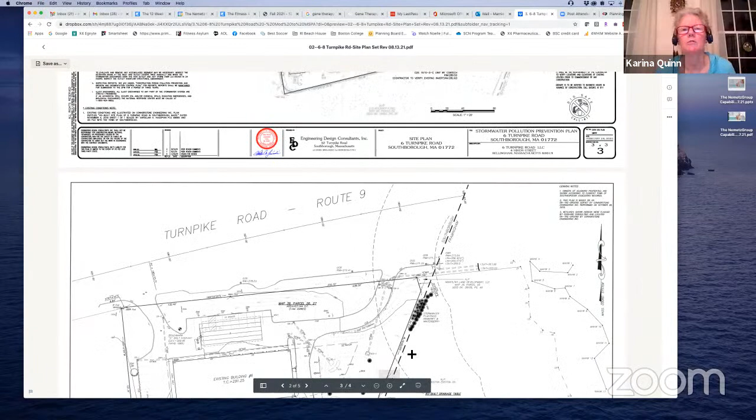So you see that cluster of shrubs right there? That's the cluster of vegetation. At least the way it's labeled, it should have been in the detention basin. Should have been designed around, should have been installed around—see, because it says stormwater plantings, inkberry and winterberry.

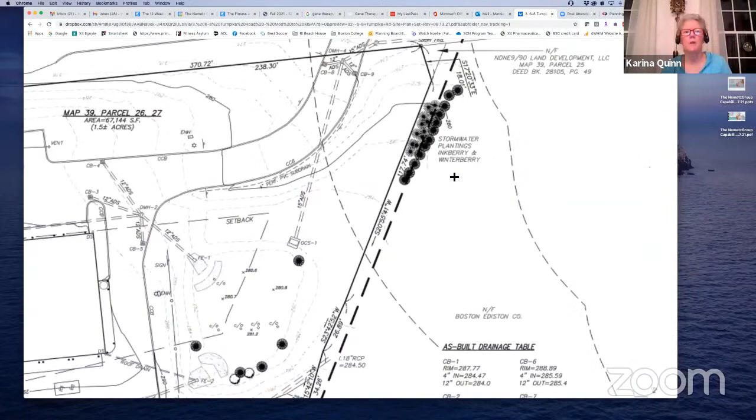So if you zoom out a little bit more and go to the bottom right corner of the property, you see what looks like a pipe running from 10 Turnpike to the south, across the corner of the property and back into Boston Edison property. If you look along the property line right there, the line on the right is the Framingham town line. The line on the left is the property line for 6 to 8 Turnpike.

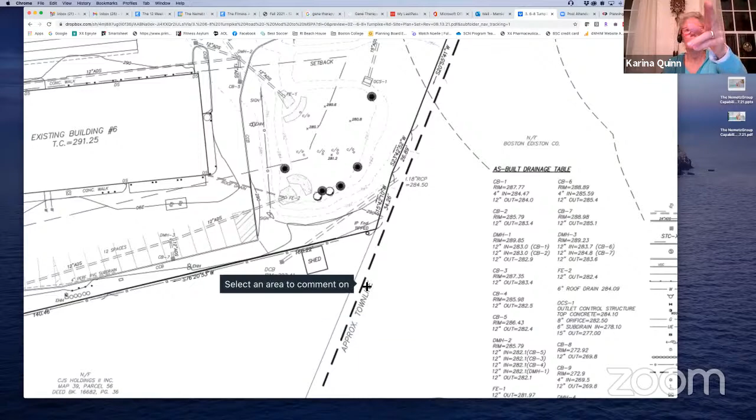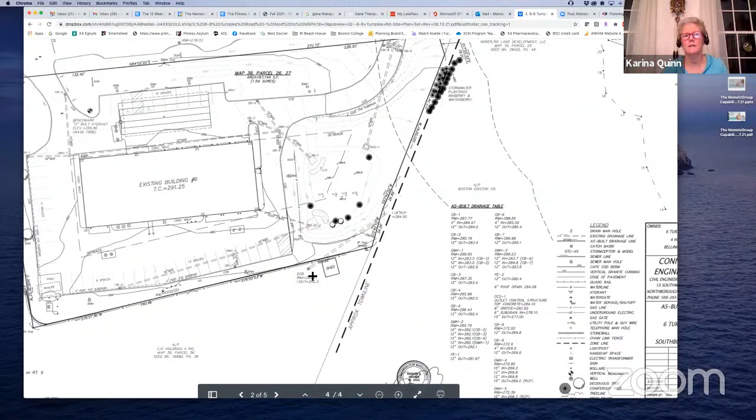In between there, I saw remnants, or what appears to be a stone wall—stone boulders, almost like you see on a scenic road, kind of cobbled together. But it's overgrown, and there is an outfall on the other side of that wall, I believe, which represents the end of the pipe back into Boston Edison property. I don't understand that condition completely.

So that's why I was looking to Peter to explain if he had spoken with Connorstone. Again, with Connorstone, all I got was that this is the as-built for the site, and they really weren't going to have any more involvement with it, at least from their perspective.

I know 10 Turnpike did have an inquiry regarding their drain pipe. There is no easement on 6 Turnpike for that drain line. But you're talking about the one in front. So they wanted to connect to the drain line in front of your property. They want to tie to the manhole in the driveway at Route 9. That's the one they were talking about.

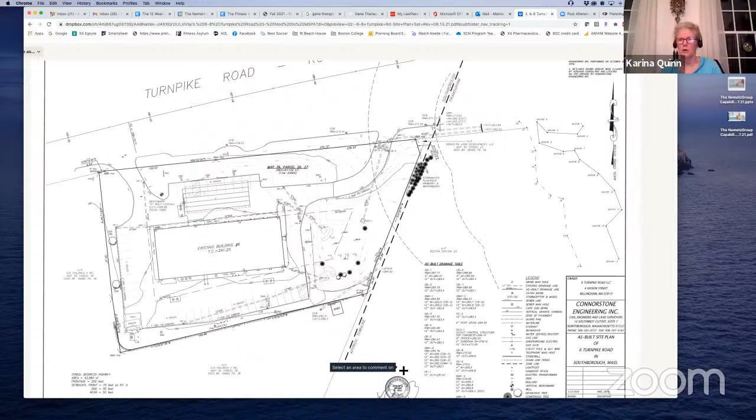I don't think it had to do with this one. I could be mistaken, but they're talking about along the front of the property. Right. And again, as I said to you, that's a modification of their plan, and I didn't really want to be involved in anything to do with their project because they don't have an easement on our project. And the property owner at 6 Turnpike really didn't want to entertain anything other than his proposal, which should stand on its own merits and have nothing to do with 10 Turnpike.

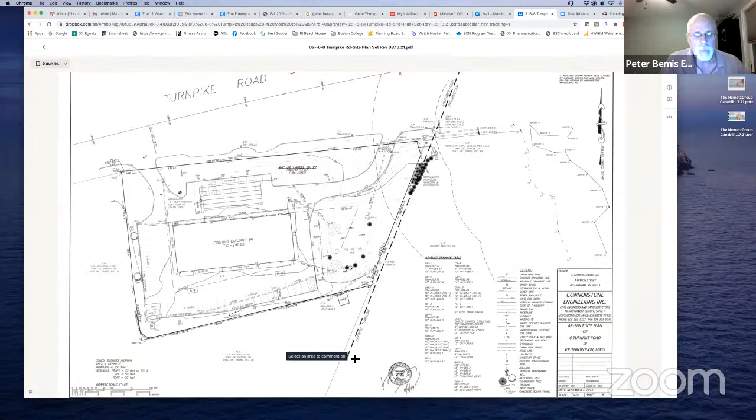So I guess in summary, the as-built is what we have. I don't have an engineer certifying letter that's required with an as-built, so I assume this as-built was for the Board of Selectmen's purpose. I believe Attorney Galvani was the attorney representing the applicant at the time with the Board of Selectmen for the additional parking for car sales. So we have an as-built, but it hasn't been reviewed by Fuss and O'Neill, and that's the as-built being used as reference.

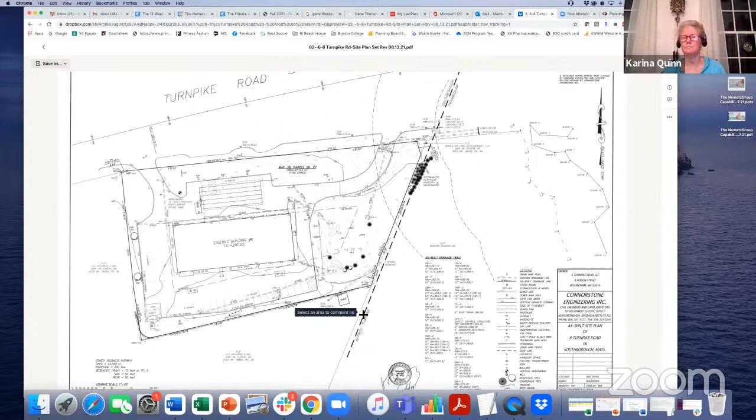So my question is, if we approve this modification and we don't have an as-built that proves the previous approval has been complied with, does that negate the conditions of the previous approval?

Typically, when I prepare a decision for a modification, one of the conditions is that all prior conditions still hold as applicable. So if a condition said plantings in the detention basin need to be such and such, that would still hold. But if it said a stone wall has to be built, then a stone wall is still required. If a southern perimeter wall was required as a condition, that's still a condition of the site plan. I always try to include that all prior conditions are still in full force.

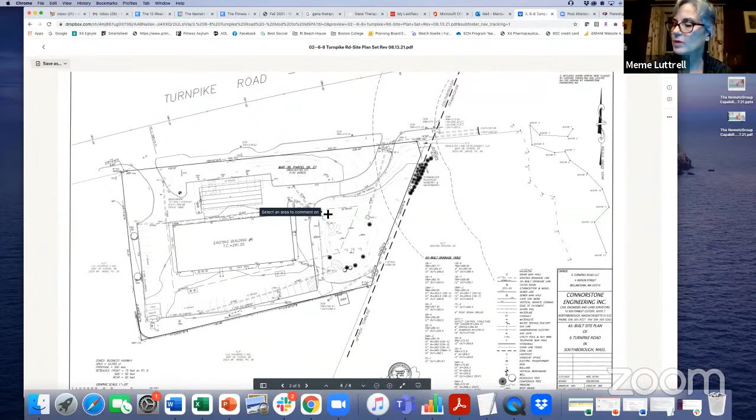And on to, just to be picky, the 3 to 3.5 inch pin oaks - to be clear, caliper pin oaks. I thought it was caliper. 3-inch trees, I apologize on that one.

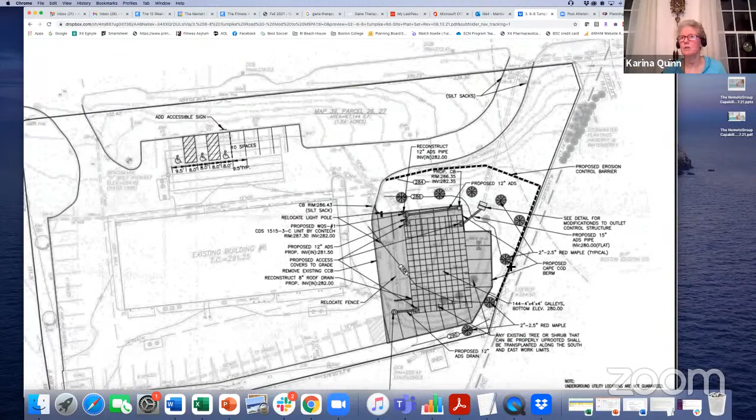Also, the maples - are they supposed to be 3 to 3.5 as well? So they're being replaced with pin oaks, 3 to 3.5 inch caliper. Well, the current plan, Peter, still shows that the maples are 2 to 2.5. I know I had said that went out inadvertently and was caught after, and I did provide an annotated plan, but I don't think you allow screen sharing, so...

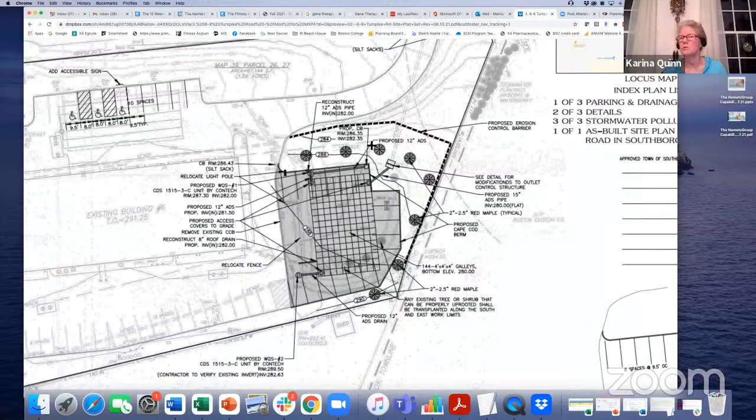I looked at the plan, Peter, that you emailed, and it still has red maple at 2 and 2.5. The one you sent this afternoon still has the same. I just want you to know, I emailed you back. Okay, I didn't - all right, so it's missing that caliper notation and it's still showing 2 to 2.5. Okay, fair enough.

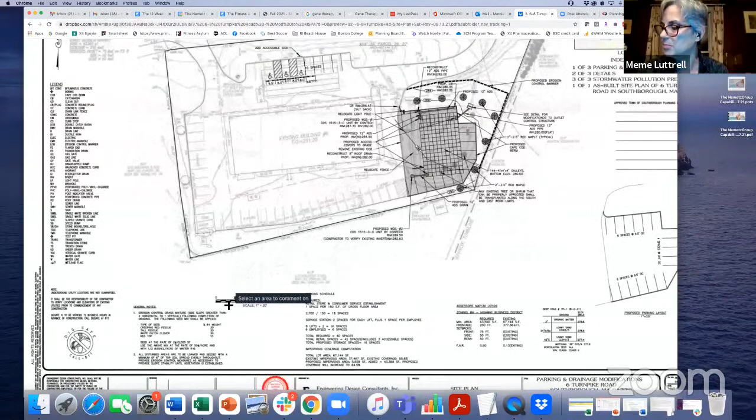And then there's a note that trees in the existing detention basin that can be properly uprooted and transplanted shall be. And if they can't be, can they be replaced? Sure, I put that in there only because I thought they were transplantable. As you identified, all those planted along the common boundary would have probably been in the basin, so at least those are someplace else other than where we want to do this expansion. I'm committed to that - absolutely, if they don't take, we'll replace them. I'm fine with that condition.

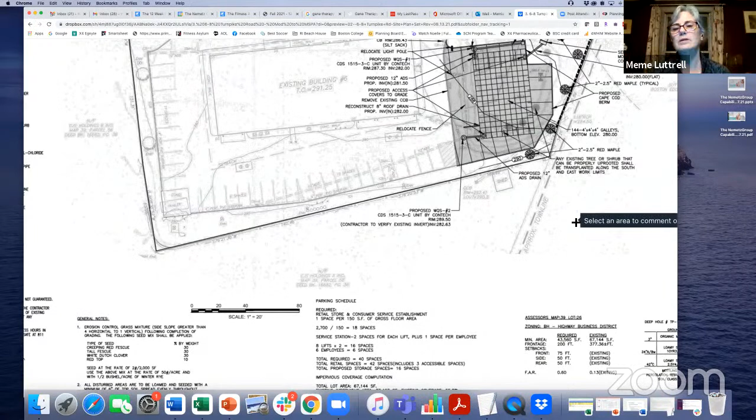So although you explained the stormwater and it's more efficient, none of the LID techniques required to be utilized in our bylaw have been utilized on the site.

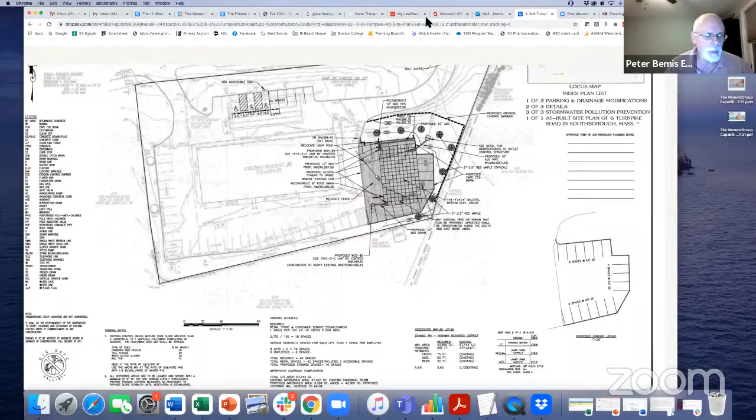So again, that's where I was going with those overriding principles. I try to read up a lot on LIDs so I understood it better. I mean, some of it's a philosophy - in many communities, they emphasize 5 or 6 principles and don't even talk about the physical attributes of stormwater, just about making things easier and more palatable. The Commonwealth of Massachusetts has their list, and I was pretty much reading from that. I think infiltration of stormwater is a smart growth technique. It's the one being implemented on this site, and by holding more water back and reducing the rate of runoff from the site, that is also a LID principle.

Yeah, I'm not using a rain garden, I'm not using a rain barrel, and I'm not using open channel flow. I explained pretty much why I can't use those principles - I'm not allowed to tie into the Commonwealth of Massachusetts Mass Highway system with open channel flow, they're just not going to allow it. So where I could make the changes, I did, and I'll leave it to your better judgment as to whether this does it. Conservation did support our proposal, and I'll leave it to your judgment as to whether we do or we don't. Thank you.

Thank you, that's all I have. Mrs. Hoolahan - I have no additional comments. Okay.

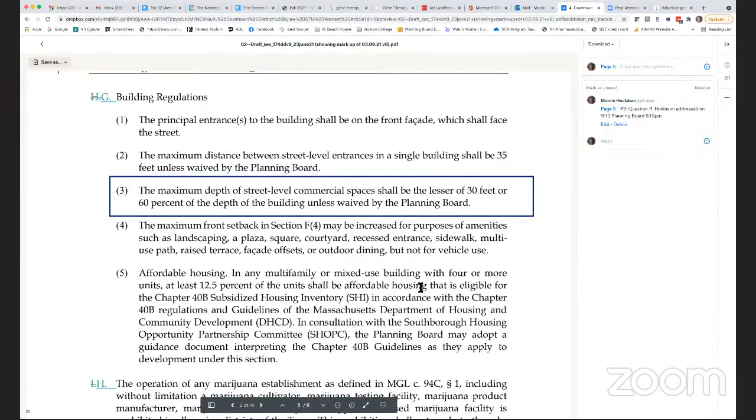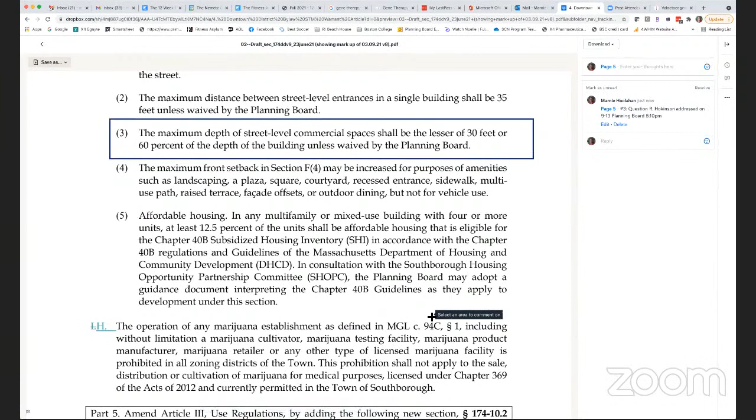And then the rest of the numbers all sort of work out that if I turn around and take a look at the floor area ratio — I can't remember the mnemonic here — sort of my house pretty much winds up being about the size of the lot. So if I've got a building about the size of my house, I need to put it in a lot that's roughly the size of my current property. So just that number, if I'm going to create a 30 by 30 foot space, I need roughly a 1/3 of an acre to 0.4 acres to have that business, based on multiplying through the rest of the numbers in the document.

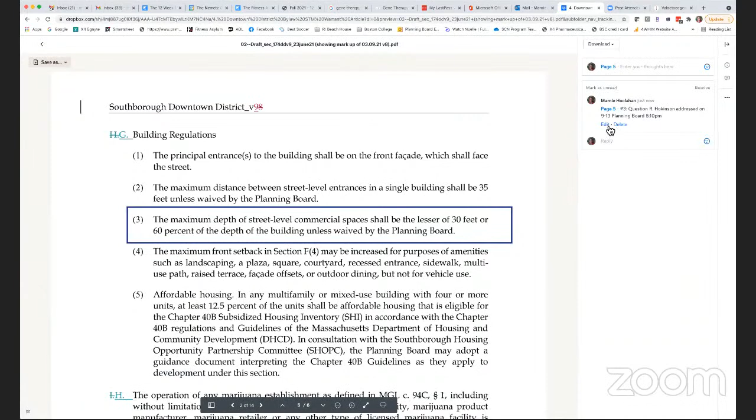So I find that a little bit concerning that, if we're supposed to be encouraging businesses, we're actually restricting the size of the first floor and actually sort of forcing part of the first floor to be residential.

Seems counterintuitive to me. Right, yeah. Now what I'll do, just because it's a little bit complicated, what I... Ray, thought can you hear me? Yep.

I'd like to ask you at this point, would you recommend deleting item G3? That would solve it.

I mean, I could use the whole 30 feet, just hypothetically. I haven't worked on other sort of geometries here. I've started off with squares because it's easy.

Well, if it doesn't work for some buildings, which would necessarily be one building, which is yours, then there's something defective. I'm looking at this and saying, if this section is removed, if number 3 is removed, how does that impact the rest of it?

Well, I think 3 needs to be cleaned up, and one solution, I don't know what type of overhead would be needed in a building to accommodate access to the 2nd and 3rd floors. So it's some sort of factor there. 60% seems a somewhat arbitrary number, because all you really need is some sort of stairwell that would allow you access up to upper floors on a mixed use building.

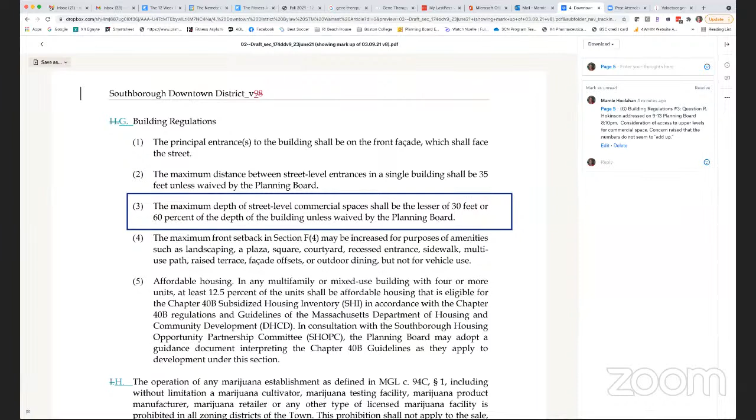Kind of hard to describe, but I did find that there is, in my case, a maximum of 20%, a minimum of 10%, and I think it should be closer to 33%. That's sort of, I think, and I can understand the big building issue, but the big building gets triggered with the planning board review. Something over a certain size requires the planning board review.

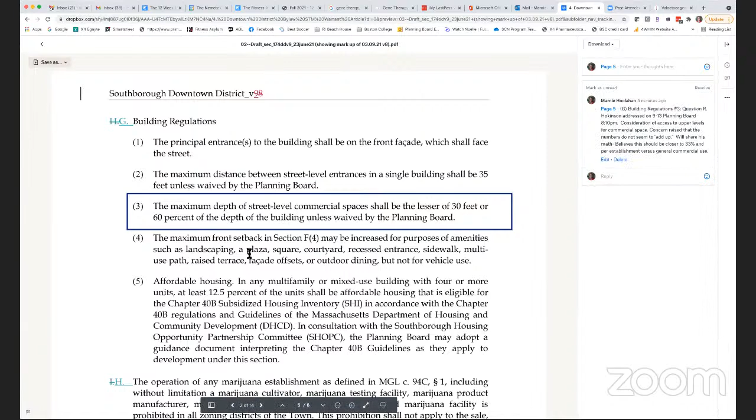So maybe that covers that. I'm not sure, actually it's a much larger size than my first floor anyway. So that was that. I guess my only other issue is to just make sure that there is some sort of system for closing on some sort of open items.

And 2 open items from past meetings. Well, one of them is just this example, and it was that 10% minimum commercial space. That was an open item. And I did request early on at the first meeting that, I think it was Claire Reynolds, who said that there was some sort of memo documenting the benefit to the business or either the appraised value of the downtown businesses.

Trying to say that somewhere along the line, somebody should work through a mathematical model showing that if you do the sort of build out allowed by this zoning, what's the impact? What's the benefit to the town, quantitatively? That was a request in the first meeting. And I'd really like to see some sort of demonstration quantitatively that all this is for the benefit of the town, as opposed to for the benefit of a few builders.

That was an open item, and I'd just like to make sure that we don't lose track of those open items and we close on them. That was it on details. I can have one other one that's slightly off. It doesn't go directly towards the details of the document.

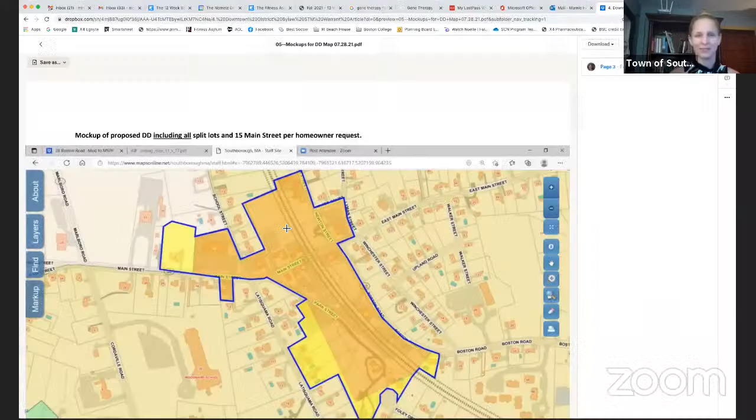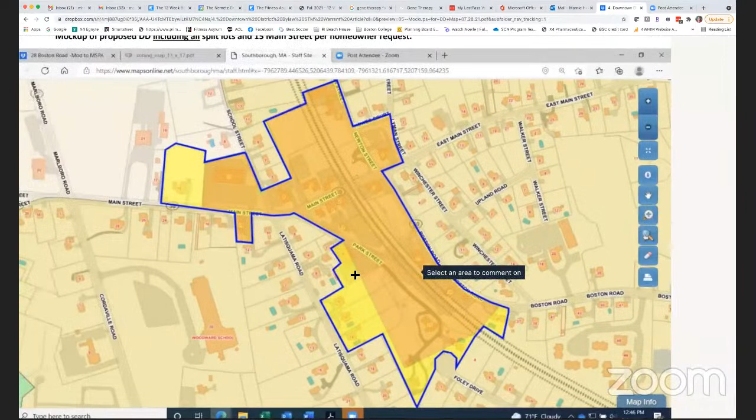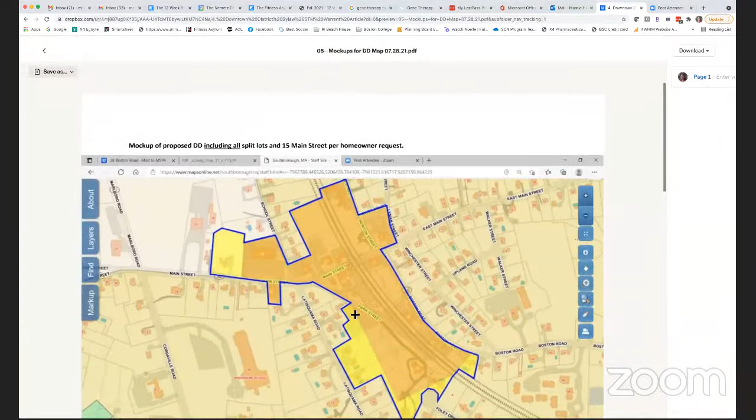Number one is, it's a little hard for me to see on my screen here, it's rather small. The mock-up including, is that the first one I'm seeing now? Yeah, number one is the mock-up proposed DD, including all split lots and 15 Main Street per homeowner request.

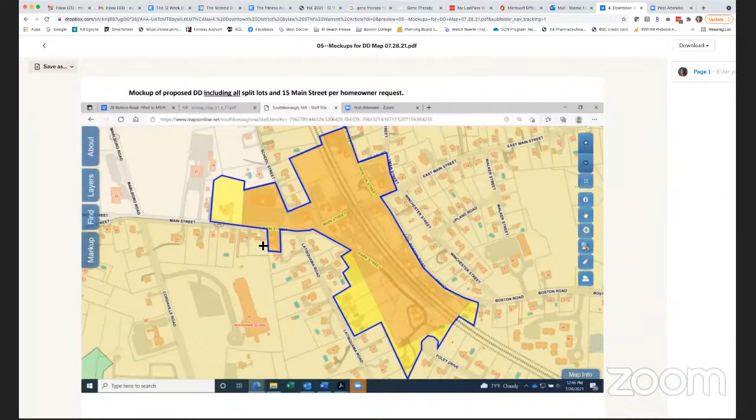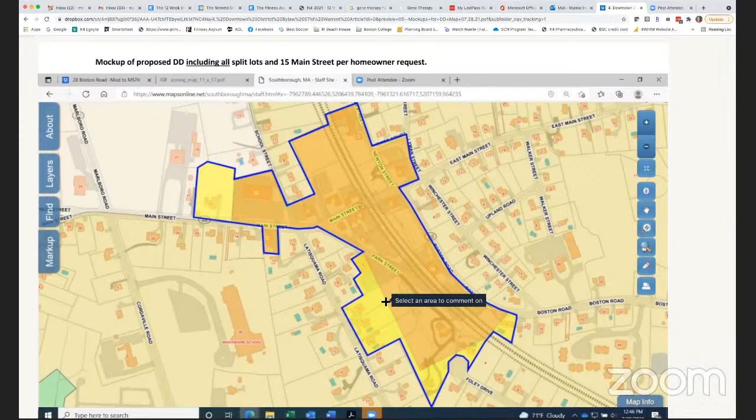And that's interesting to see, of course, completely would be absurd. Putting, for instance, I believe that would be 10, 12, and 14 Latisquama, subject to, for instance, demolition, and somebody could build a nice Applebee's on those 3 contiguous lots. So that's not going to happen.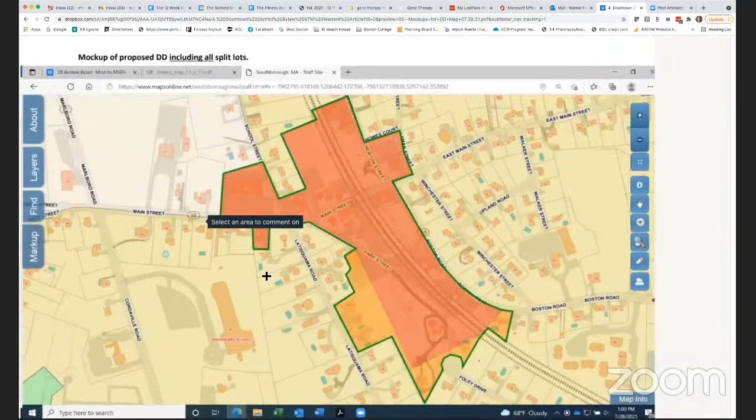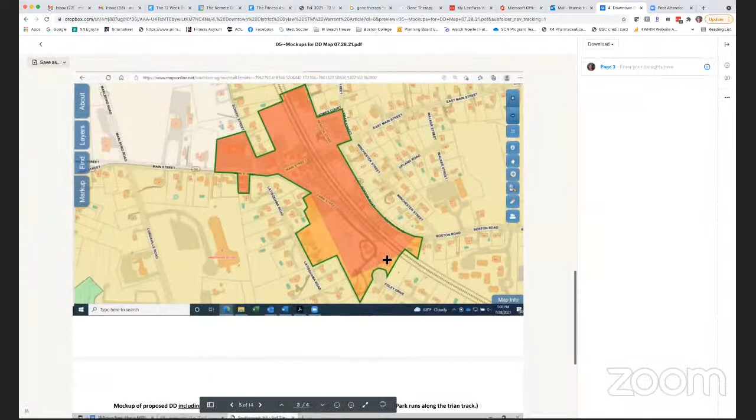Number 3, including all the split lots again, interesting but crazy. Number 4, including only split lots at 5 and 25 Park. Excluding. Including only, that's number 4. I'm skipping ahead to number 4, including only split lots in 5 and 25 Park. Again, the inclusion of 25 Park is actually crazy.

And there's actually an error there because that rendering also includes the CSX parcel. That's a 1-acre lot. 25 Park does not run along the train track, but the CSX parcel does. So 25 Park is buffered from the railroad tracks by the very slender, almost like a sliver of CSX property. That's where Falcone parks their trucks on the west side of the tracks.

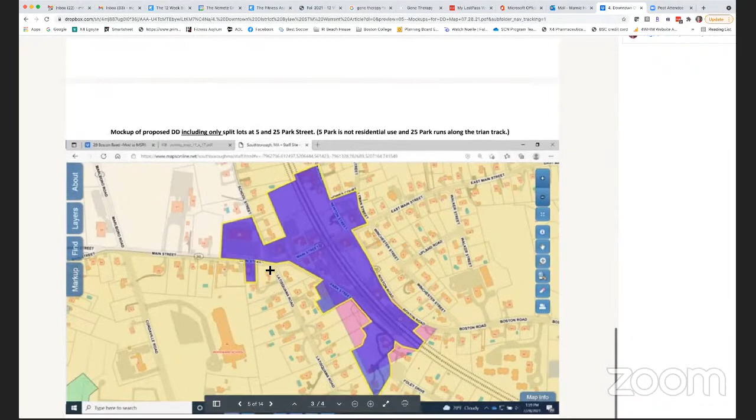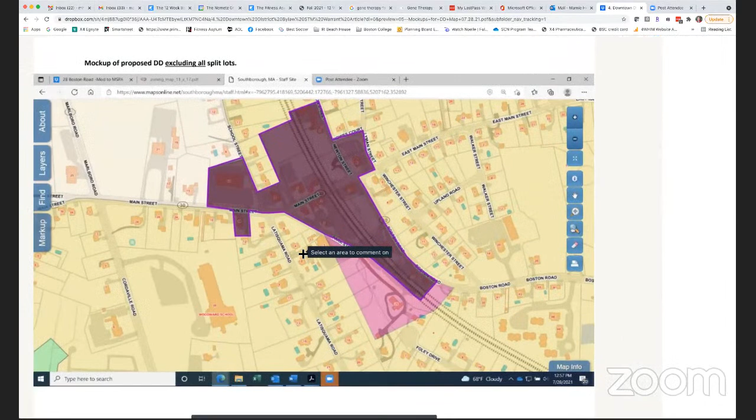But happily, and I'm again very grateful to Sarah for her efforts here, you have the solution in my mind in map number 2 on page 2. This is the one that's the mock-up of proposed DD excluding all split lots. And the illustration actually excludes all split lots as well as that wafer thin CSX parcel, which is between 25 Park and the tracks itself.

That's the parcel ID number on that CSX parcel. If you, for instance, were to look at the GIS maps online, it's parcel 5592. 25 Park is parcel 5593.

So the map on page 2, labeled mock-up or proposed DD excluding all split lots, excludes the 7 split lots: 10, 12, and 14 Latisquama, 5 Park, 35 Boston Road, 2 Foley Drive, which is a silly one where the lot line, or the district line, cuts through the poor fellow's swimming pool, and 25 Park. That's the 7 split lots. And that rendering also includes the CSX parcel, which I think there is the strongest possible argument by the logic of the illustration itself to exclude as well.

I don't see any reason why CSX needs to be rewarded with by-right zoning. So your answer, and it's an excellent one, protects the integrity of not only Latisquama Road, but all my friends and neighbors on Foley Drive, Peggy Drive, Birchwood Drive, and McNeil Drive.

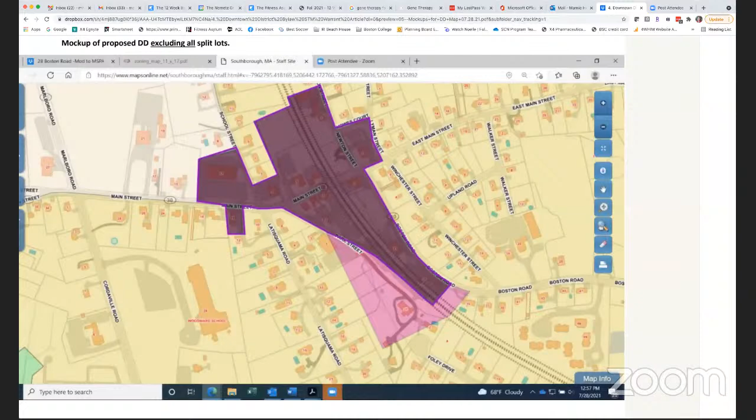Before I yield, I'd like to say one other thing about this whole proposal. There's a lot still hanging fire: the lot coverage, the design guidance, a floor area ratio, a $4 million wastewater treatment plant with no estimate of what it's going to cost to run it, and, as Mr. Hokanson touched on earlier, no hard data on what the actual economic benefit to the town would be to balance out all this expense.

But I want to set that all aside, because I think there are good minds at work on those issues, and maybe they'll get worked out and maybe they won't. What I want to engage you with, a planning board, is the philosophical question that I've kind of been wrestling with on this whole issue.

We've got an elected planning board, and I hold this planning board in very high regard, with great respect for your many years, in some cases decades, of experience in this field, as a very sober-minded, thoughtful group, elected and therefore accountable to voters. I don't understand why ultimately, with all due respect for your desire to work well with other boards and commissions, the planning board wouldn't choose to politely say no thank you to this whole thing and to by-right zoning, because I frankly appreciate the discretionary review of the planning board in its traditional function.

I am very concerned—the downtown district is a very small area of town. It is, in fact, arguably not only quite small but historically significant, economically critical, and central to the identity of the entirety of Southborough, the linchpin of the whole town. I want the planning board overseeing development proposals down there. I don't want a set of criteria created where, as long as you satisfy them, you're in, and the planning board doesn't get to exercise its traditional discretionary review.

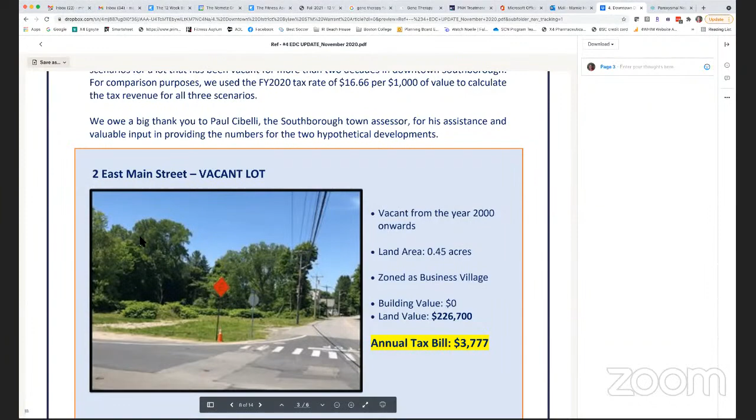Okay. And these are figures that were just roughly done, but as somebody is bringing up here, thank you very much. A big thank you to Paul Cibelli, who put in that and provided the numbers for a couple of hypothetical developments. So that information

is in progress—it's actually a working document. As I think it was Andrew Dennington who said, it's a little bit difficult to figure out what the revenue is actually going to be until you decide what kind of businesses are going to be there. And don't forget, we're not talking about developing a whole lot of property here, so it's not going to be the cure for the town's tax shortages, possibly.

All right, so that's one thing that I wanted to bring up. I think the other thing is Mr. Miller brought up a problem about no one knowing the cost of the wastewater.

This was done in conjunction with—somebody mentioned a figure of $150,000 of grant money to come up with this study. That is incorrect. The town applied for a grant from the Office of Energy and Environmental Affairs. The town received a $50,000 grant. $43,000 of that money was spent. $19,000 of it was for Weston & Sampson to provide their wastewater feasibility study.

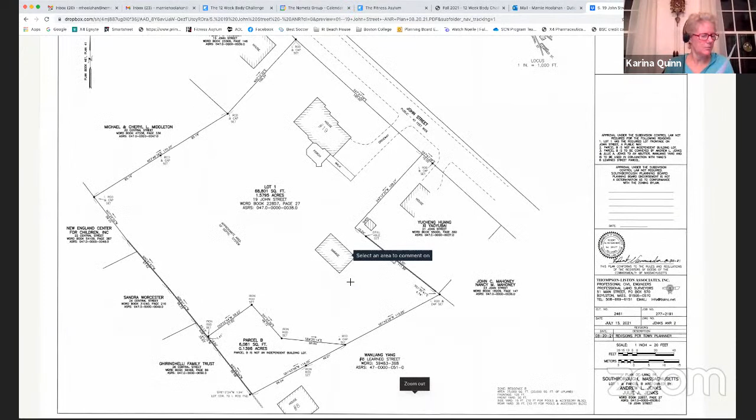So that's where we're at. I did review the plan. Some revisions were made and they resubmitted in proper format, which allowed us to file it with the town clerk and accept the application. That's it.

Mr. Liston, you're on. My name is Seth Liston, I'm with Thompson Liston Associates. We're here to basically represent the two parties who agreed on this parcel exchange. At this time, there's no intent, or at least it isn't being proposed now, to combine the two lots, parcel B with...

Mr. Yang's other property. All of the new corners have been pinned, and it's basically for Mr. Yang's use. We believe there's a garden that he's been maintaining on this piece of property, and Mr. Jenks has agreed to sell a portion of the property so that he can continue to maintain the garden on his own property. We're all saying that this is not to be considered a building lot.

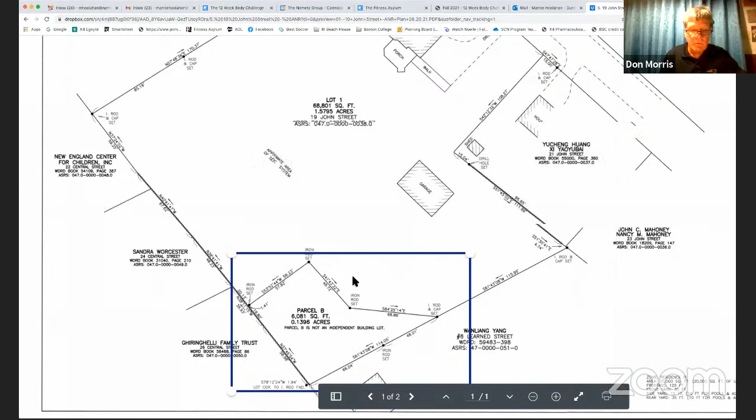Sarah, can you run the pointer across the proposed new lines? Marty's actually controlling the screen at the moment, but she's doing a great job. Can you see it? Yeah, just run it along the lines that are being added to this plan. Three lines. That is correct.

Correct? Yep. Okay, open up to the board. Mr. Mills? I wish Mr. Jenks was here so I could make sure he had the adequate frontage, but I know that was already said because I recall him going through the motions on every planning board meeting we had for an ANR. I have no questions.

Mr. Stein? I think that he also used to like draw that linear point from the street or something like that. Nobody could do it like Bill. I certainly have no questions. Mrs. Luttrell, no questions. Mrs. Houlihan, no questions. I have no questions.

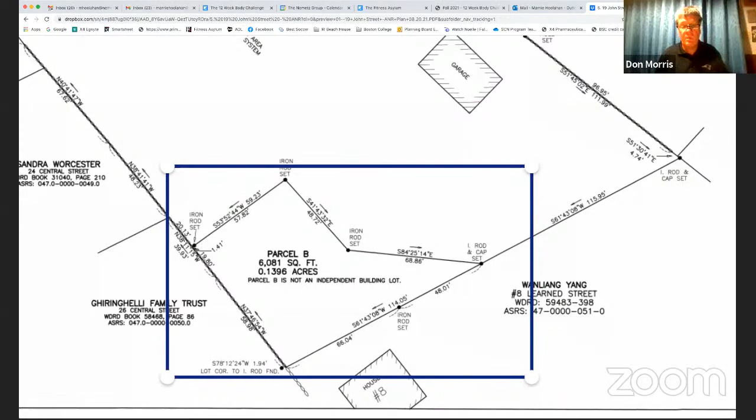We'll entertain a motion to endorse the ANR. So moved. Seconded. Motion's been made and seconded. Any discussion? Any questions, comments? Hearing none, all in favor: Morris, yes. Mills, yes. Stein, yes. Luttrell, yes. Houlihan, yes. Very good. Saying hi to Phil tonight, if he's there.

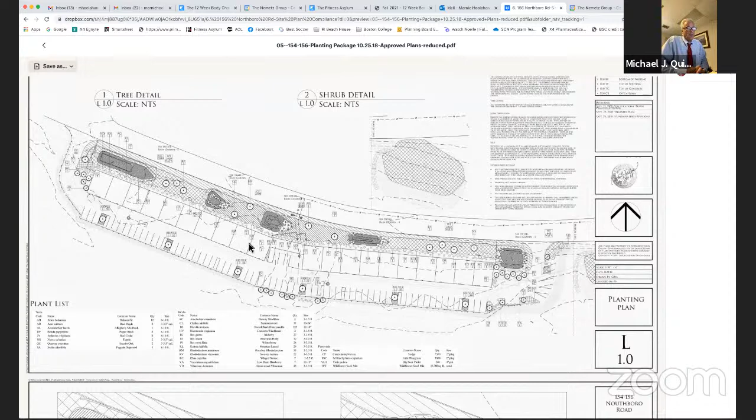So right now, the Mass Certified Landscape Professional - we've also hired an arborist and landscape architect, Sudbury Design Group. They're going to identify those plants, and we're going to have to come in and ask for some type of waiver because we just can't obtain them.

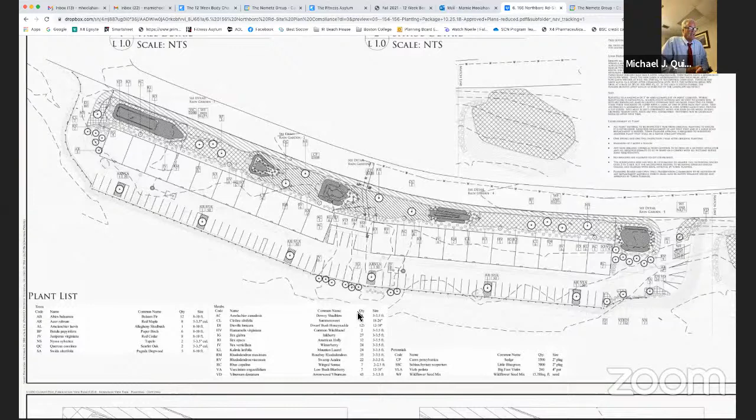So basically, from what I understand - I was not involved in the permitting process on this particular site - all the species that were specified were native species, and some of them, as I said, we just could not locate. We called SiteOne, we called Bigelow, we called several other landscape suppliers in the area, and we just couldn't obtain them.

Another problem we've discovered: once I've submitted these plans to various landscape architects, some of the species of plants identified or requested to be planted, it's been recommended to me that they not be planted in those particular locations, because they may be native, but they're not native to be next to a parking lot or next to a building - they really belong in like a canopied area. So we will be coming back to the board requesting a variance.

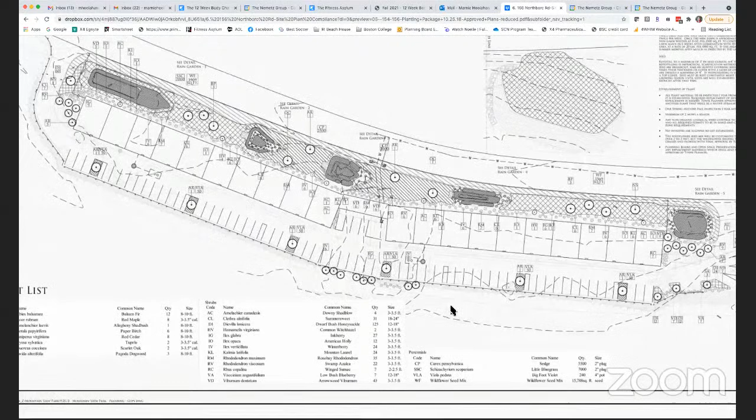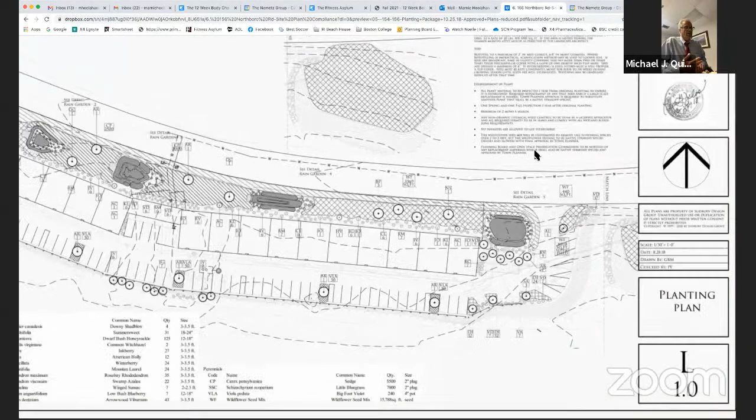Sorry, you cut out there for a second - I don't know if that was for everyone or just me. So you're coming back for a variance? Well, we're coming back for some type of change in the approved plan, because once again, some of them we can't obtain, and some of them, it's been suggested to us, don't apply to this type of use next to a parking lot or next to a building.

There's just been too much sunlight, and some of these plants only survive in an area like a very wooded area where there's a large canopy and there's lots of shade and moist soil.

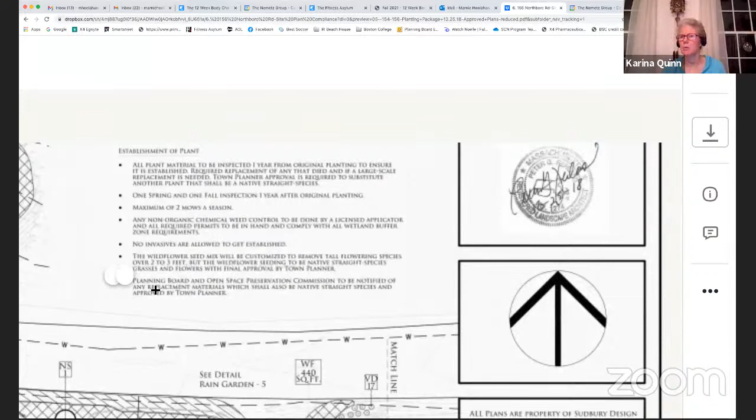So it's my understanding, Andrew, Michael, what you're indicating is that you would be submitting a modification to the site plan in the future? That's correct.

So would that be also for the fact that these would no longer be rentals, but now you're going to sell them as condos? It has nothing to do with that. It has only to do with we're trying to get the certificate of occupancy, and we're trying to get the building occupied.

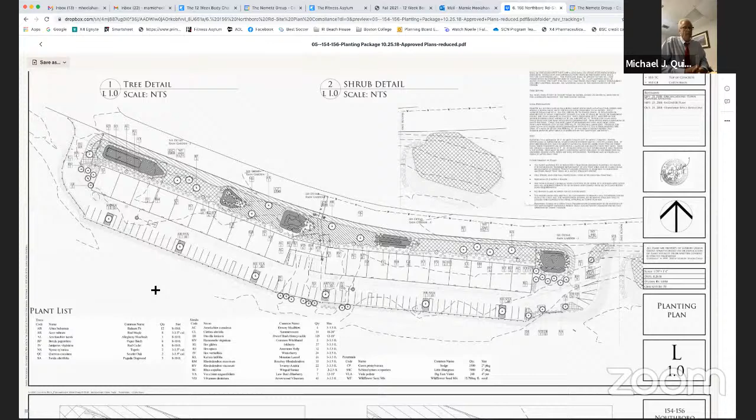We would plant what has been specified, but we just can't find the product. It's not available. Have you partnered at all with the Open Space Committee?

They were very involved with the plantings that were put into this. I know you weren't part of the original group that came before us, or the proponent that came before us, but this was a lengthy and involved original review with Open Space.

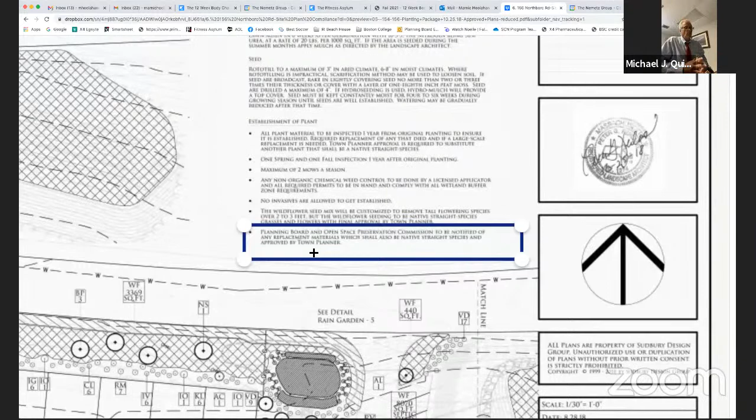I have not spoken with them, but I'd be more than happy to speak with them and get their input, along with the landscape architect and the certified landscape professional and the arborist or botanist, whoever else we're going to use. I'd be more than happy to have them be part of the solution to some of the problems that we're facing. Okay.

Karina or Sarah, can you tell us if Freddie is still here? I know she spoke earlier, I don't know if she's still on. Let me take a look. She does - she is still here.

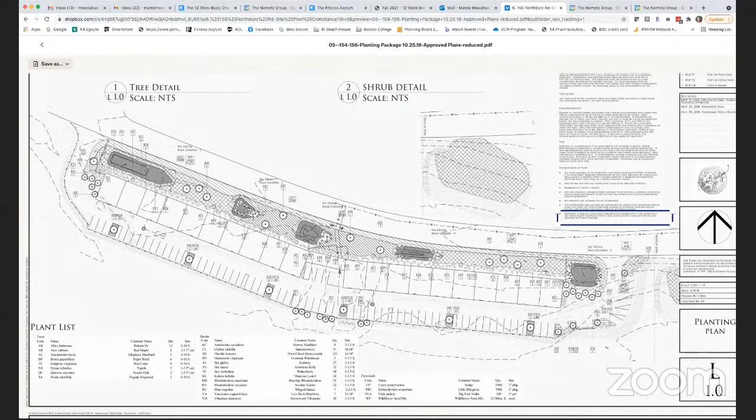So this is not—I'm not an expert in this at all. That's why I've hired a Mass Certified Landscape Professional, the landscape architect, an arborist, and a botanist. And they all feel strongly that some of these cultivars are made or hybrid for this type of use. I'll submit something to the town for you people to decide, but I think we should go in with this with an open mind.

Agreed. I think if you can partner with the Open Space Committee, and I know Mimi would probably be very interested as well—I'm not trying to speak for you, Mimi, I'll give you a shot in a second—but this is the first time hearing of this being brought before us as a discussion item. So I think the starting point would be with the open space.

The other piece, Karina, just if they are going to switch from rentals to condos, what does that have to do with the change in what was originally permitted? I haven't seen that come before us in the past. So that would be—if we're going to make a change overall, let's combine it all into one for everything, so that we don't have ongoing, lingering issues that we're trying to resolve with this property.

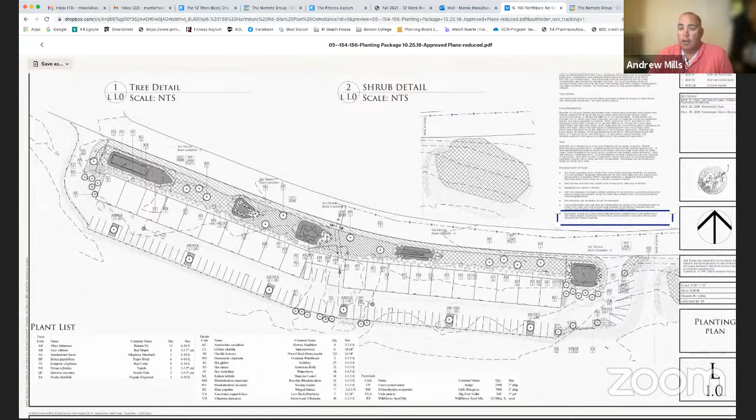So with that said, Mr. Stein, any comments, questions? Yeah, I mean it's very similar to the 6 Turnpike matter that was before us earlier this evening. We owe it to the town and our stewardship of the planning department that we honor what was committed to on an original site plan. And it has to be a very compelling case, at least for me, to make any variances or concessions on a site plan that was agreed upon by a proponent, and then a proponent failing to fulfill the commitment that was made.

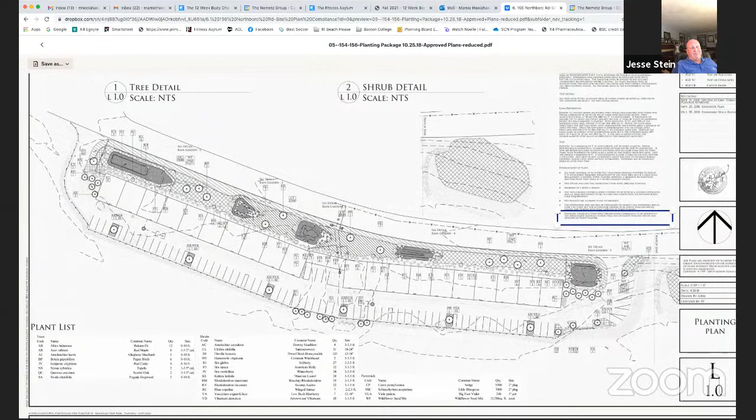So it's very disappointing to hear this. And I certainly understand the position the current proponent is in, that they've inherited an incomplete site plan, or incomplete situation, if you will. But it is what it is. And if it's going to be brought to compliance to the satisfaction of the Open Space Commission, then I might entertain voting in support of a site plan revision. Thank you.

Thank you. Mimi. I agree with Mr. Stein. We spent a lot of time on the landscape portion of this plan, and there was a certified landscape architect that proposed this plan. I assume they believe it could be built as proposed. I went on the site walk, and the landscaping isn't even close to what the approved plans show. I didn't see any of the wildflower seed mix. I know that's pretty easy to come by, but I didn't see any of it. There were a lot of weeds and plants I couldn't identify, and non-native plants, non-native trees, Japanese dogwood. So it was pretty far off and pretty disappointing.